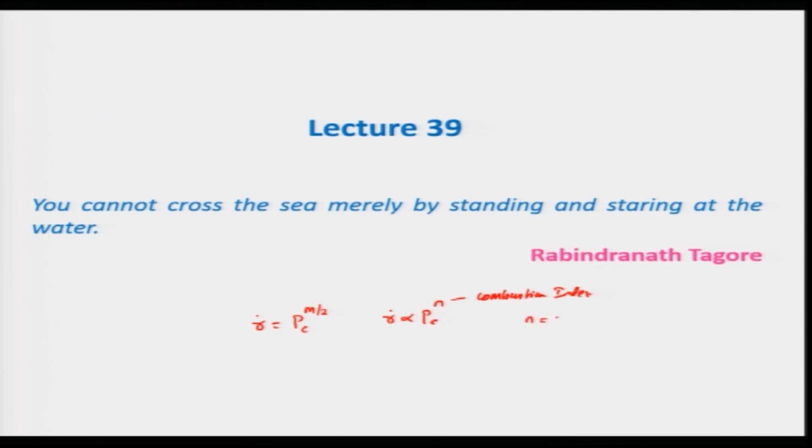This n is basically your combustion index or the pressure index, whatever you call it, and this n will vary around 0.3 to 0.8, and this is known as the order of reaction. Keep in mind that m is generally n1 plus n2, and we have already seen that for premixed flame it will be around 1.8 or less than that, whereas for diffusion flame this will be around maybe 0.6.

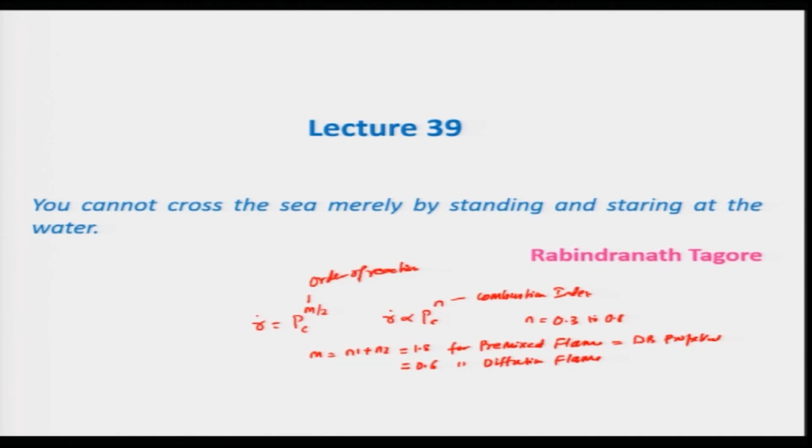So, n will be of that order, and one can see that double base propellant will be in this order, whereas the diffusion flame will be occurring in composite propellant, and that will be in the range 0.3 to maybe 0.6 or 0.7.

Today we will be discussing how the chamber pressure in a solid propellant rocket engine changes, and it will depend on various other parameters like burning surface area, throat area and other things like characteristic velocity. That means in this case we will not be considering the aerodynamics in the port itself. For that we will make certain assumptions, and the first assumption is uniform pressure in the combustion chamber.

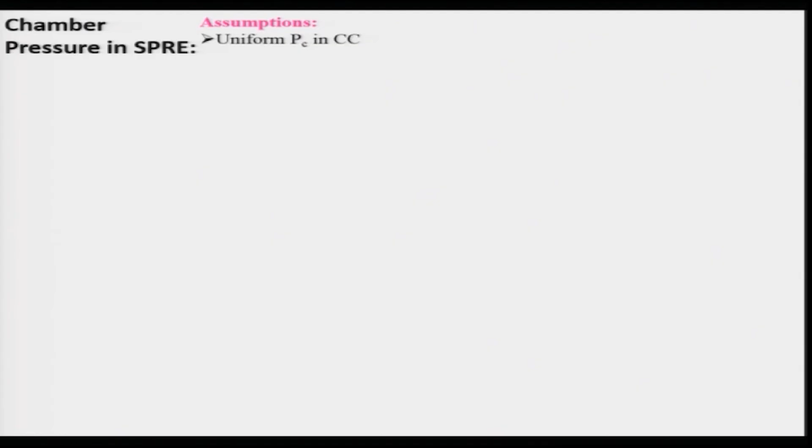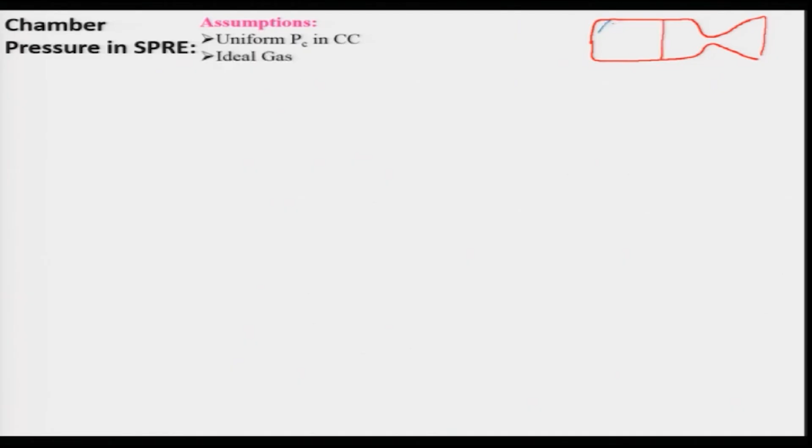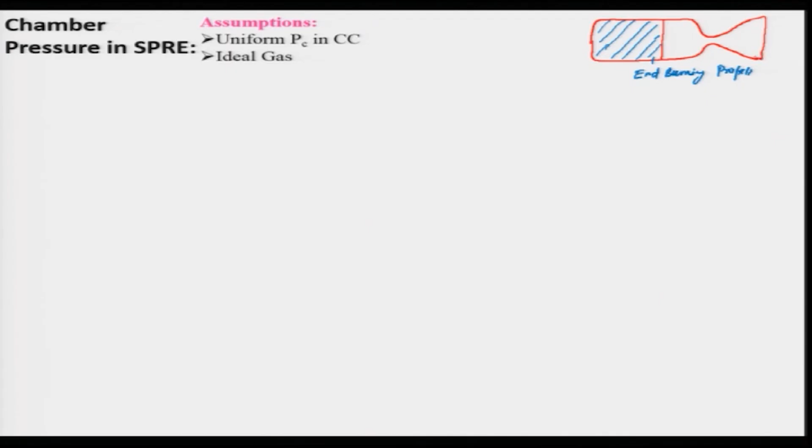If I consider a nozzle rocket engine here, and a propellant surface, let us say this is an end burning propellant and this is my propellant surface area, and this area is your throat area A T, we are assuming chamber pressure, if I take this as a control volume like this here.

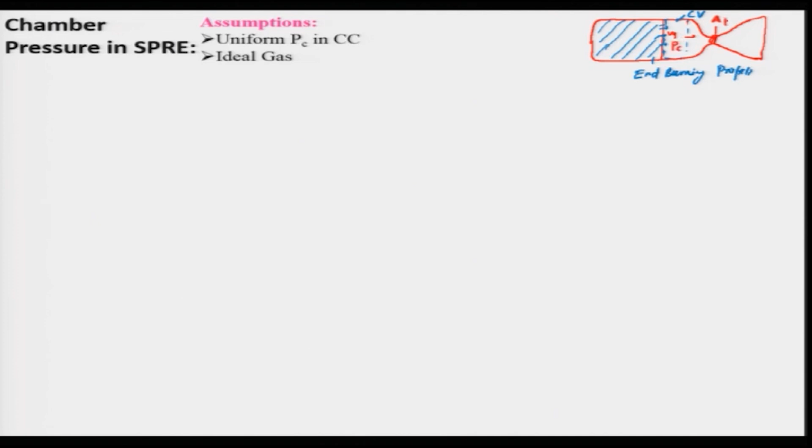This is your control volume. What will happen is the propellant will be regressing and the gases will be coming out. Gas will be entering with a certain velocity, V g, and this also will be going out, and we consider that in this chamber P c remains constant, all these gases obey the ideal gas law, and the burning rate remains almost constant. Of course, we are considering the end burning propellant grain.

So, therefore, the burning rate will be remaining almost constant, and we will have to basically do a mass balance. That means a certain amount of gas will be coming out and it is passing through this. Let us say this is the mass flow rate through the nozzle, because this is your throat area

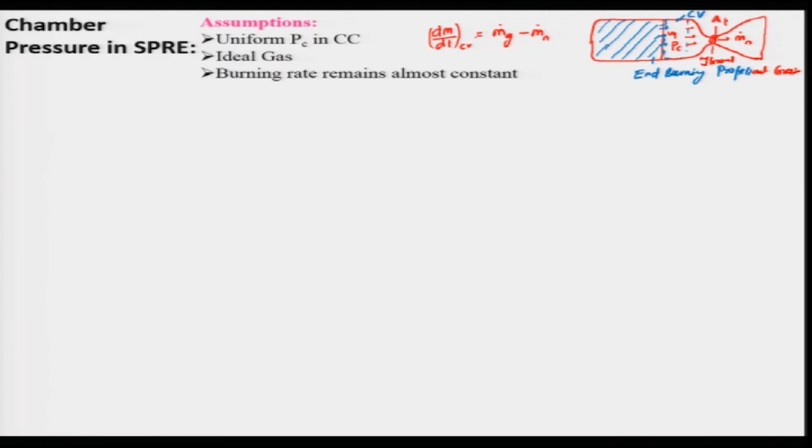m dot n, and then the mass balance we can consider as dm/dt, that is the rate of change of mass in the control volume, will be equal to m dot g, that is the mass of gas generated due to the burning of propellant, minus the mass passing through the throat of the nozzle or passing through the nozzle.

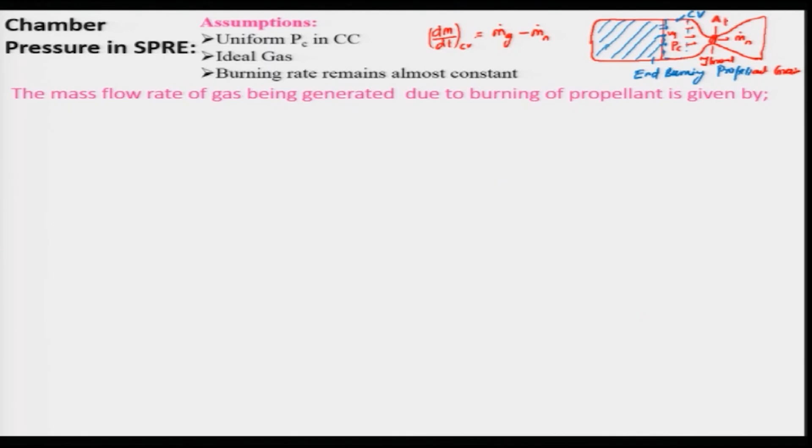So, the mass flow rate of gas being generated due to burning of propellant can be determined as m dot p, which is equal to m dot g, and m dot p is nothing but rho p, the density of the propellant, A_b, this cross sectional area, and r dot, your regression rate. We know that r dot is equal to a P_c to the power n; this we have already derived.

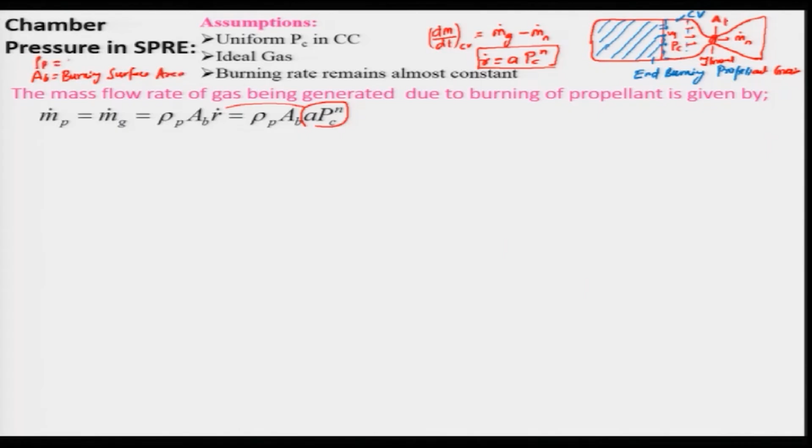So, this is nothing but your r dot, right, and A_b we know is basically the burning surface area, and rho p is the density of propellant.

And the gas flow rate through the nozzle is given by, assuming the throat to be choked, that means the velocity at this cross section will be equal to the speed of sound, and we have already derived this expression earlier, that is m dot n is equal to A_t P_c divided by C star, and keep in mind that C star is your characteristic

velocity that we have already derived, and which is equal to A_t P_c over root of R T_c times root of gamma into 2 divided by gamma plus 1 to the power gamma plus 1 divided by 2 gamma minus 1. Keep in mind that as we are using ideal gas, we can consider a gamma which remains constant throughout, meaning the property is not changing along the length of the combustor, and this portion we call capital Gamma.

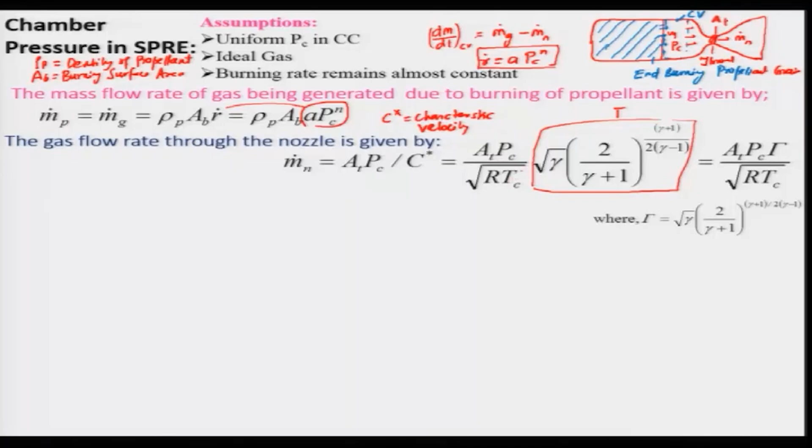That means the mass flow rate through the nozzle is basically proportional to the throat area, proportional to the chamber pressure, and inversely proportional to T to the power half, and also the gamma factor comes into the picture.

So, if we strike this balance, if you look at equation 1, we can write it down and substitute these values, that will be dm/dt, and we know by the ideal gas law that m is nothing but P V by R T, and R is your specific gas constant, that is R is equal to R_u, the universal gas constant, by molecular weight.

So, d/dt of P_c V_c by R T_c is equal to m dot g minus m dot n, and we already know that m dot g is nothing but rho p A_b a P_c to the n, and m dot n is A_t P_c capital Gamma divided by root over R T_c.

So, we will basically expand this term keeping the temperature constant, and then we can get the expression. Keep in mind that temperature remains almost constant with time, because that depends on the propellant composition, and it hardly varies with increase or decrease in chamber pressure. So, that variation we can neglect.

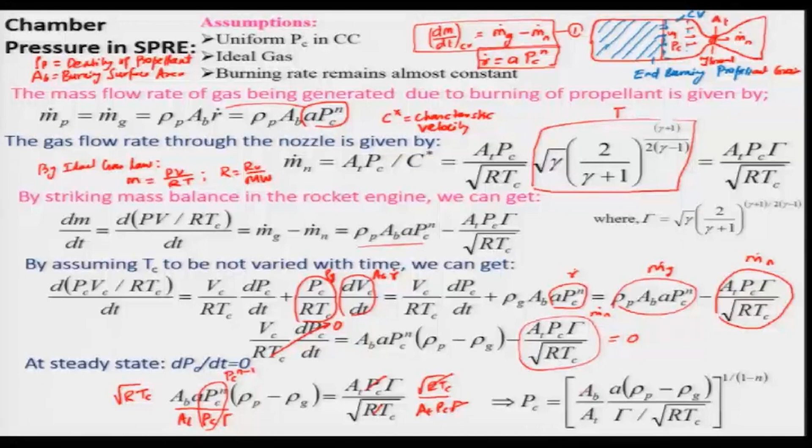So if I want to get P_c, I get A_b by A_t, a by gamma, and rho_p minus rho_g divided by gamma over root of R T_c, because you just take 1 over 1 minus n. That you will get very easily. So P_c is a function of this, known as the area ratio, and a function of a. Keep in mind that r dot equals a P_c^n, which is nothing but a over (T_i minus T_p) times P_c^n; this is your r dot.

Therefore, it is also a function of T_p, the propellant grain temperature, and of the combustion chamber temperature. Generally rho_p is much higher than rho_g; the density of gas depends on the chamber pressure, but rho_p is of the order of 1800 kg per meter cube, whereas rho_g will be at least one order of magnitude lower. So sometimes rho_g can be neglected as tending towards 0, giving a simplified formula.

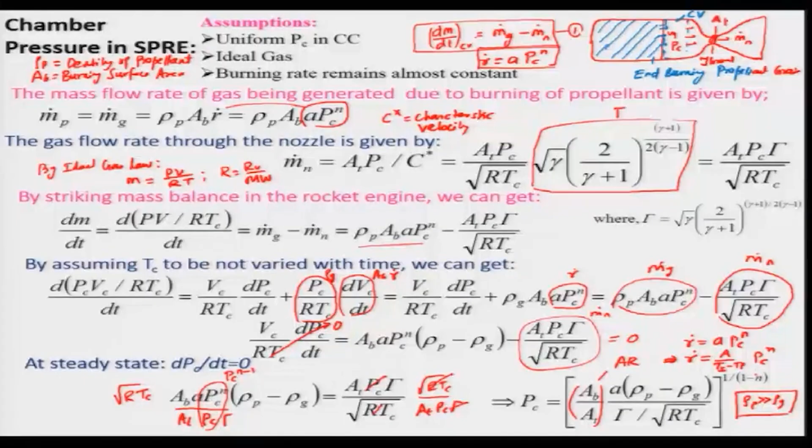From this expression you can see that chamber pressure is also a function of n, and if n is closer to 1, then 1 over 1 minus n becomes a very large value. Therefore, it will be problematic. It may lead to a tremendous increase in chamber pressure. It may lead to explosion. So one has to be very careful about it.

So let us take an example to see how we can apply this. An end burning rocket employs double base propellant with a density of 1900 kg per meter cube, grain diameter of 125 mm, generates around 205 Newton over 215 seconds, with characteristic velocity of 1350 meter per second and thrust coefficient of 1.2. The combustion index and burning constant are 0.7 and 3.2 millimeter per second for the regression rate expression r dot equals a1 (P_c over P_r)^n, with reference pressure 7 megapascal. Determine the length of the grain, chamber pressure and throat diameter of the nozzle.

So what is given is rho_p, 1900 kg per meter cube, diameter of 125 mm, thrust 205 Newton, and burning time t_b of 215 second. Characteristic velocity is 1350 meter per second, thrust coefficient is 1.2, n is 0.7 and a1 is 3.2 millimeter per second. To find: length of the grain, chamber pressure and throat diameter d_t. We can get a lot of this directly; let us see how.

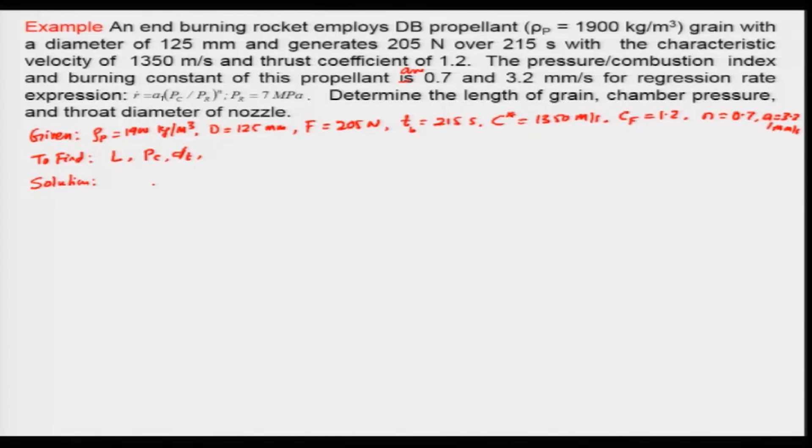We have to find the length, and this is an end burning grain. So this is the end burning grain; this is the length we have to find, and this surface is A_b. For that, L, and the diameter of the propellant D, are here, and this is d_t, the throat diameter.

And we know that F, the force, is equal to m dot p C star C F. In this case F is given, so we can find out m dot p is equal to F by C star C F, that is 205 by 1350 into 1.2, and you will get 0.13 kg per second.

If you do that, you will get the mass of the propellant m p, which is nothing but m dot p into T b. So, m dot p is 0.13 kg per second into 215 seconds. So, I will get something around 27.83 kg of propellant being used in this engine.

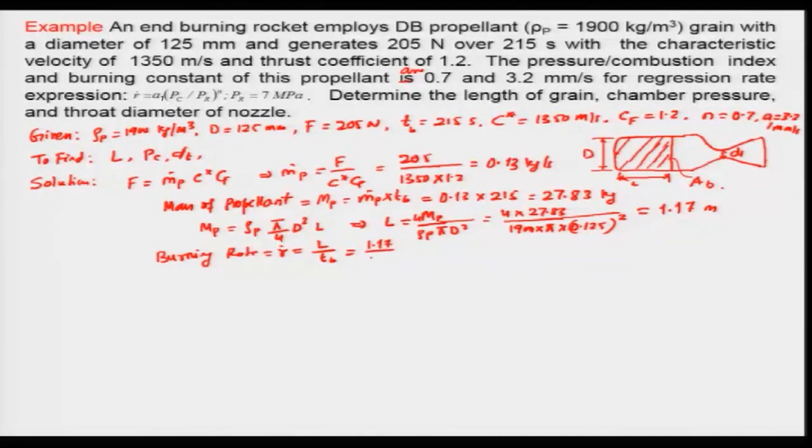And of course, we can find out the burning rate very easily. The burning rate R dot is L by T b, that is, the entire length of the propellant will be burned, and that is 1.17 divided by 215. I will get something 5.43 millimeter per second.

And now I need to find out the chamber pressure. We know the expression for chamber pressure from the analysis we did just now. The chamber pressure P c is expressed as A rho p C star A r, power to the 1 divided by 1 minus n, where gamma by root over R T c comes in. And keep in mind that here we are assuming rho g is too small, therefore we are using rho p.

We need to find out A; rho p is known and C star is known, and the area ratio we also need to find out, and we should find out P c. P c we can find out very easily, because we know the regression rate R dot is equal to A 1 into P c by P r power to the n. So we know the regression rate is 5.43, A 1 is 3.2, P c we do not know, the reference is in megapascals, power to the 0.7.

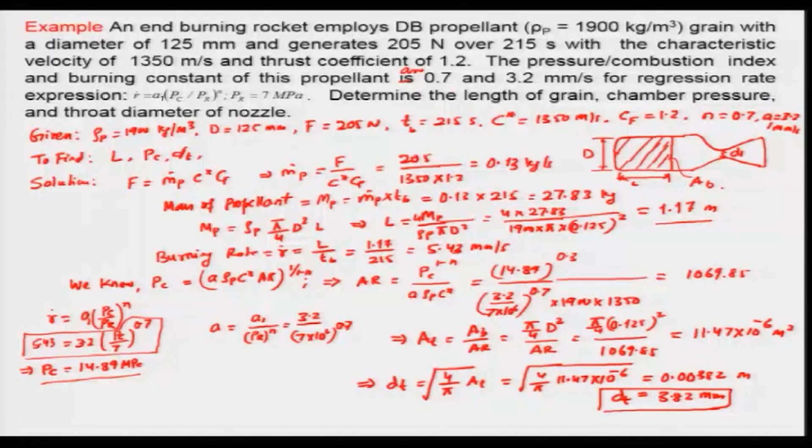Thank you very much. We will stop over here, and in the next lecture we will look at grain design.